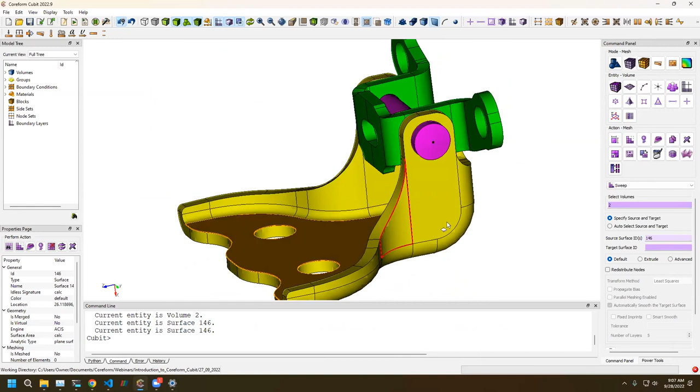Cubit only supports 1-to-1 or many surfaces to one surface sweeps. And so this would not be a sweepable topology. But with compositing, what we can do is we can take all of these surfaces and essentially make them one macro surface and do the same with the other surfaces, so that we would then have a 1-to-1 sweep. So I'll show that here, building that.

So if we just draw this volume by itself, I'm going to color my curves black here so we can see as this happens. Now we're going to access this through the command panel. I'm using the classic navigation for the command panel, which can be set in the tools options under the command panel's classic. You may not have the classic mode. I just grew up with the classic mode, so that's what I'm familiar with. So your ordering might be a little bit different.

But where you're going to find it is under Surfaces, Modify, and then Composite. And we call it virtual geometry, which is kind of our synonym for virtual topology. They mean the same thing. Some of our operations in Cubit are virtual, and you'll see that in a little box here that'll identify that as such. So I'm going to select my surfaces.

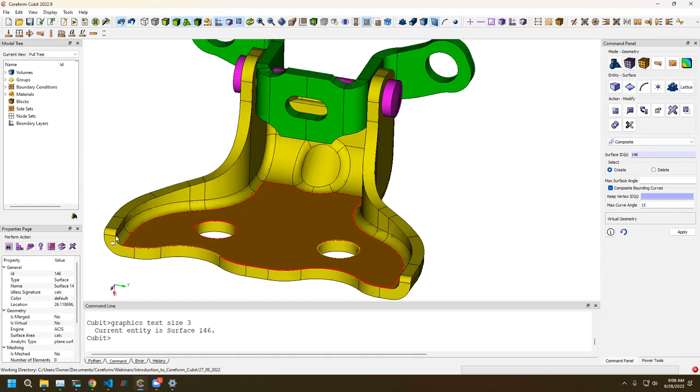Now I could try to manually go through and select multiple surfaces, but that might be a lot of clicking. So one of the things that's really cool in Cubit is if we select a surface and then right click, we have options for selecting multiple surfaces at once. This is like a cavity, so we could select the entire cavity, and that selects multiple surfaces. But these surfaces are also all tangent and continuous with each other, so we could also have selected continuous here.

So I'm going to select those. It automatically populates the pick widget here for how many surfaces I'm selecting. I'm going to go ahead and apply. And what you'll see is that once I've hit apply, what had been solid black curves are now these dashed lines. Those dashed lines essentially mean that the meshing tool is going to ignore those boundaries.

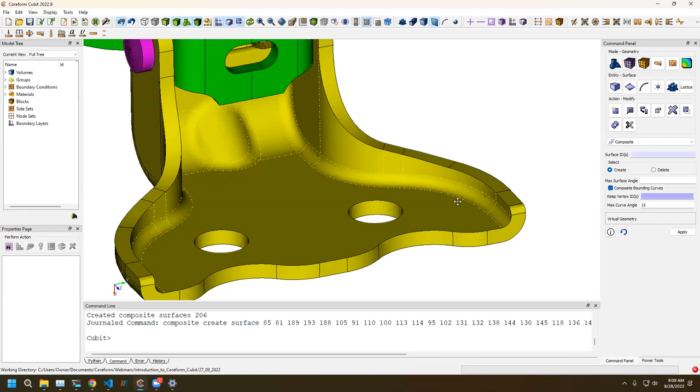So just to show that real quick, if I build a quick mesh on this, you'll notice how these elements, if I flip back and forth, still are matching to the geometry, but they're no longer restricted to the topology of these surfaces. And if I were to refine the mesh more, we would get closer and closer geometric approximation.

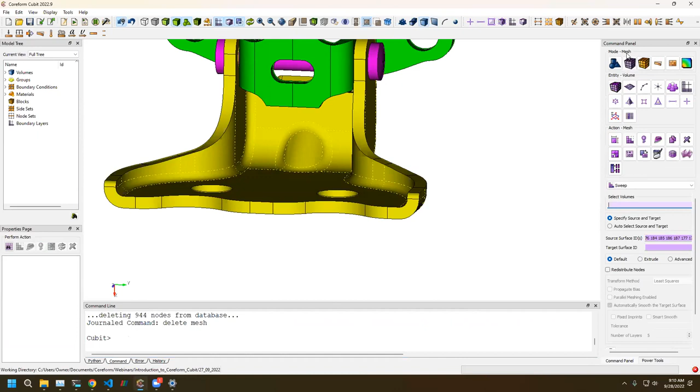But now I'm going to go ahead and select the other surfaces on this other side. I'm going to composite those as well. I'm going to delete my mesh real quick. And so I can now mesh this volume. So if I go into my mesh mode, volume, sweep, I can then pick my source surface. Notice it's a single ID now, and then a target surface to a single ID, and that builds the mesh on that part.

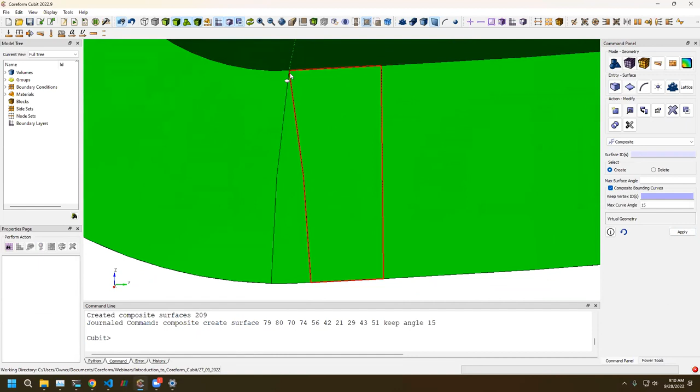Similarly, I can do that with this other part. I can take that same approach of doing composite surfaces. The one challenge here is it's not actually sweepable because I've got some linking curves that essentially take a finite distance to a zero length. So I can't sweep along that. But I can again use compositing to say, well, I can kind of see what's going on here. I just need to have linking curves that go from one surface to the other without kind of disappearing.

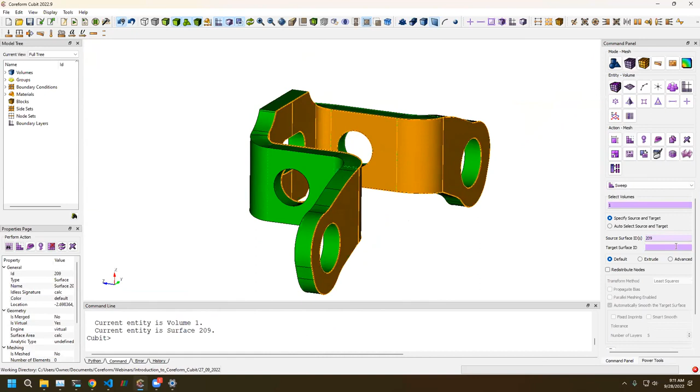So I'm just going to select these surfaces and composite them together into a single macro surface. And so now we can see that that topology is going to be ignored by the mesher. And I've got a similar case over here. And so now with that done, I can select my volume, select my source surface and my target surface, and build my mesh.

Now I could even have gone a little bit more heavy on my compositing. We see here that there's maybe a small surface here as well. I could have composited that in too. So anyways, Cubit's thinking here real hard. I've got a development build here, so it's got maybe some stability issues. So we'll wait on that, but that'll finish meshing at some point.

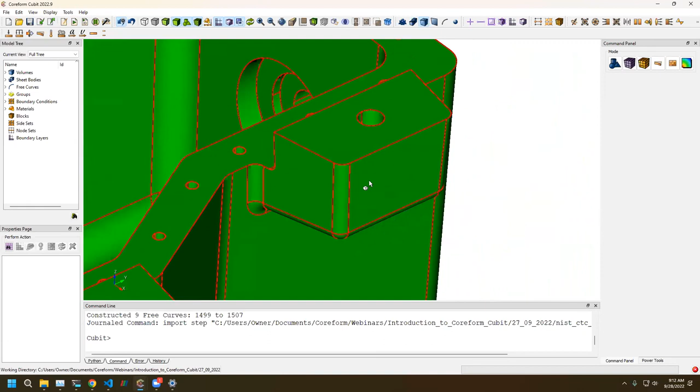I'm also going to show another model that's maybe a little bit more challenging. So let's say that we've got this gearbox housing and we want to run an analysis on this, but let's say for sake of argument that we noticed we'd had some failure occurring in this standoff here. And so we want to have a detailed mesh of the fillets on this subregion, but we don't really care about the fillets everywhere else.

As you can also see, there's some orphan curves and maybe some embossed features that we wouldn't want. So I'm going to show some cleanup of this model first before we go with meshing. And there's a free surface here too. So one of the things I like to do is clean up all of these free curves, either by selecting them in our model tree and deleting them.

We could also run a command, say delete curve all, in our command line, and that would delete them all. Or through the GUI, through the curve tool delete, and we just say all. This will only delete orphan or free curves, so it won't delete curves that are already part of a volume. So you can see I deleted that and some of these curves have gone away. I still got this surface here. I can delete that as well by just deleting all. So it's just deleting those unowned surfaces.

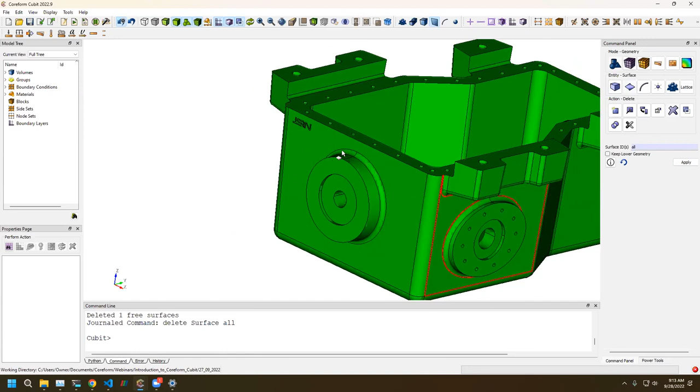Now, compositing is a virtual operation with surfaces, but we also have real operations. So if we were still under the geometry mode, surface, modify, if instead of compositing we chose remove, we'll see we don't have that virtual geometry box here. So this is going to be a real geometry operation.

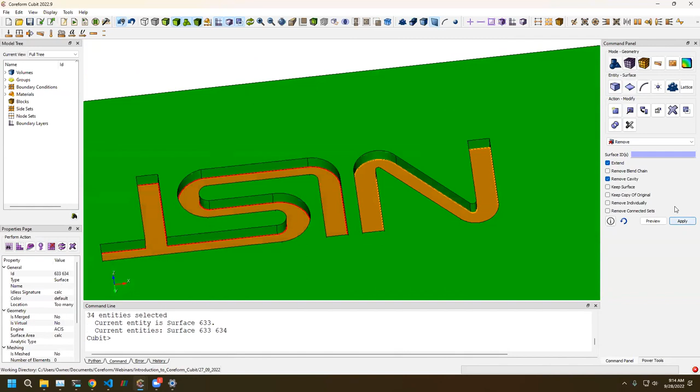And what I can do is just select a single surface inside of these subregions. And notice if I have remove cavity on, that will then remove all of these surfaces, which would almost have been the same as if I'd right-clicked and said select cavity. So you can see what's going to happen if I had that remove cavity on. I could only select a single surface and remove them from the model. So just some really quick tools to do some of that.

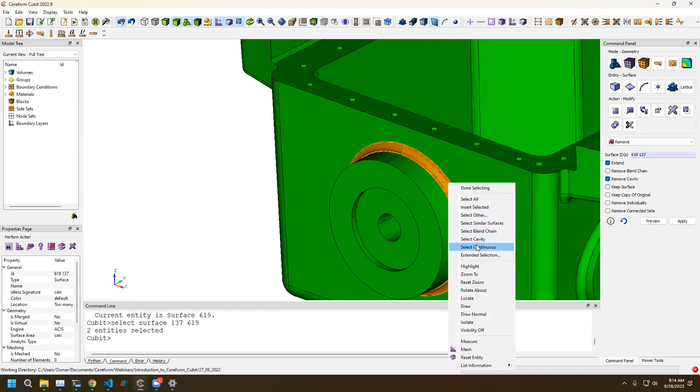Additionally, we mentioned previously that maybe we don't want to have to worry about a lot of these fillets. So we can select surfaces quickly. We can select similar surfaces. So I've selected these two fillets here. When I right-clicked and said select similar, it selected the surfaces over here as well. And I can remove those just through an extend. And so I can select an entire blend chain and remove them.

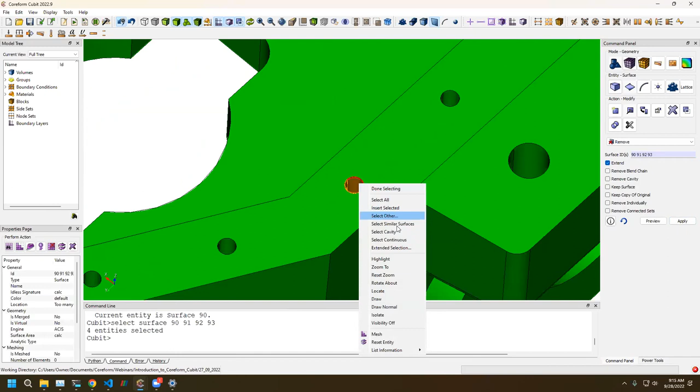And so it's a really quick way to remove a lot of fillets from your model, as well as if you select a blend chain and you want to select any other blend chains that are equivalent to that. That's going to select the opposite side as well and remove them. Say that we want to remove these little holes that we don't really care about. We can select the cavity, select similar. It'll select all of these little holes and we can remove them.

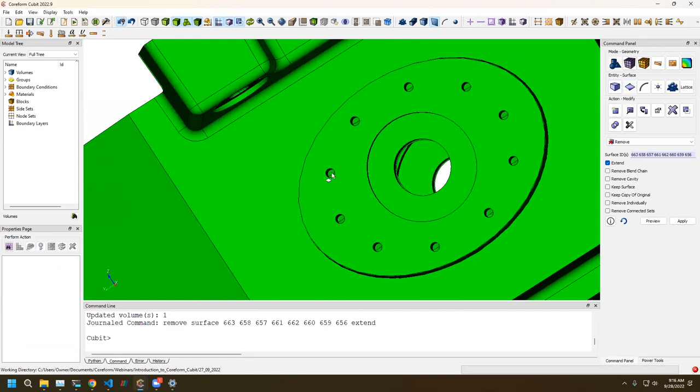If you select a surface with your mouse and maybe you just missed by a little bit, if you hit the tab button, it'll cycle through selections. So by selecting a single surface, I can then find that internal surface. So I'm going to select this hole, select similar. It's going to select the other hole over there. Insert those into my pick widget, remove them. And similar story with these holes. So again, through the right-click context menu.

So now, as I was saying, let's imagine that the challenge I've got is I'm trying to mesh this little standoff here. So one of the things I might want to do is extract out that single volume. So I'm going to webcut my geometry until I've got that volume isolated. So I'm going to sweep a surface here, and sweep this surface perpendicular.

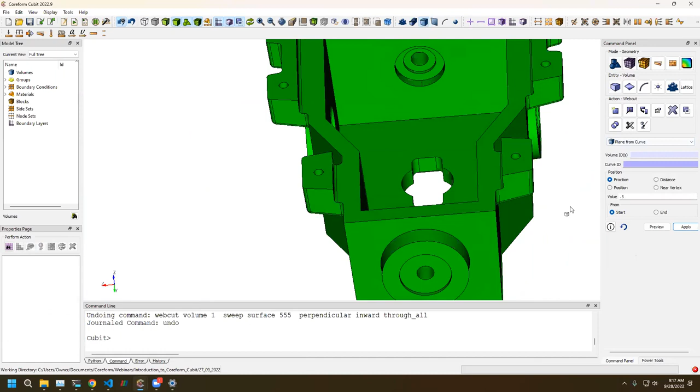Oops, that's not what I meant to do. I meant to chop plane from curve. So I'm going to cut this volume. I oftentimes like to do this preview to see what my cuts are going to be doing. We're going to draw this volume by itself, and then I should be able to sweep curves. So I'm going to cut this volume with these curves swept in the -1, 0 direction.

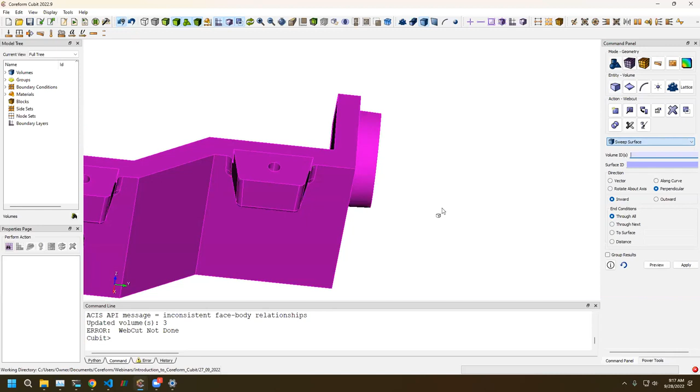All right, so we just need to do a couple more cuts here. So let's sweep surface, perpendicular first. This may actually do what we wanted. Good. So one of the things I wanted to do here is this fillet.

If we had chopped this fillet instead by a plane surface, so if we had used this plane, do you see how that would have led to kind of a tangency on my cut? That would essentially be really difficult to hex mesh. If you were to refine your hex mesh, you get closer and closer to a tangency, which would result in worse and worse hex element qualities.

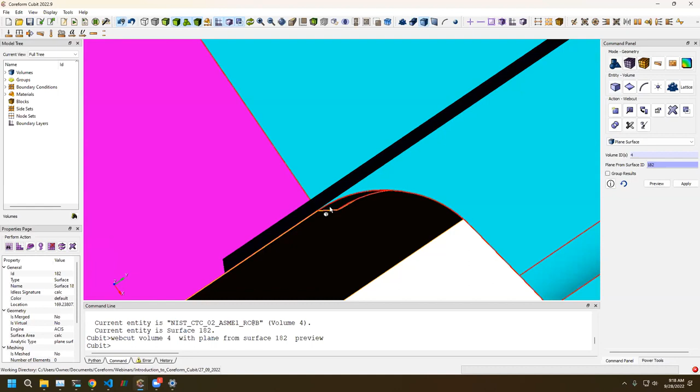That's why when I saw that fillet, I chose to do a web cut that would instead result in me getting kind of this perpendicularity at that. So I went from a tangency to something that's perpendicular. And that's really crucial if you want to try to keep those kinds of features in your model.

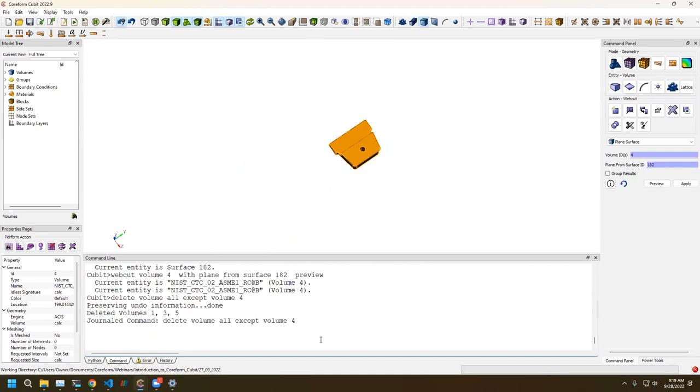Now, for simplicity here, I'm going to remove all of the other volumes. So I'm going to delete all volumes except for volume 4. I'm just going to type it in my command line here, delete volume all except volume 4. And that's using the extended Boolean functionality of the command line. And then I'm going to compress. I've just done that so that we can show how we're going to mesh this one volume and use compositing to help us out here.

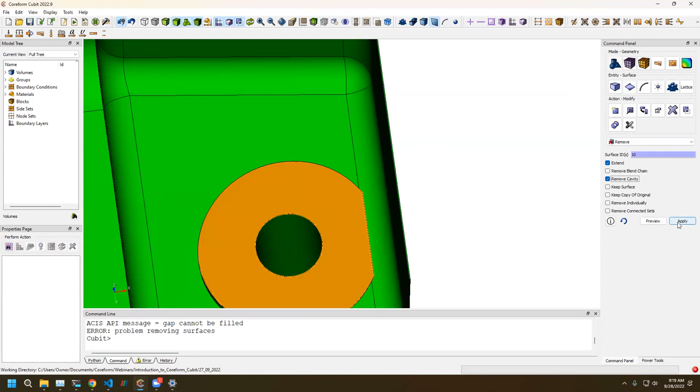So if we just explore this volume a little bit, some of the things we'll notice are I've got these shoulder fillets, and these curves, if I look at them, they don't quite lie in a plane. Some of these are like a straight line, but this is like an arc curve that kind of comes out of the plane. And this curve takes another angle. So you can kind of see, I can't really do a cut. Oh, and one more surface I meant to remove here real quick is this little surface. There we go. So I can't just chop it off. It's maybe a little bit confusing how we would do that.

So what I'm going to do is, I've kind of mentally already segmented this volume into different regions. I can see how, again, I can get myself perpendicularities by, say, chopping this volume with this curve, taking the normal at this vertex, which is going to just, oops. But yeah, that's right. So even if we were to do that, you can see that I don't even have planarities here. And so oftentimes a similar functionality to the plane from curve is to actually do this sweep surface.

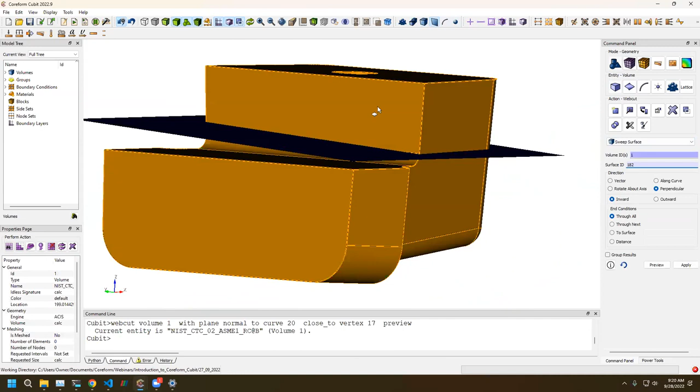So I'm going to take this volume, I'm going to sweep this surface perpendicular to itself. And then that's going to get me that nice little cut across that surface here. So that's the cut I'm going to do. Hopefully that's kind of clear why I've done that. But that separates this volume from everything else. Similarly, I can see that I can get a perpendicular cut if I chop this volume here.

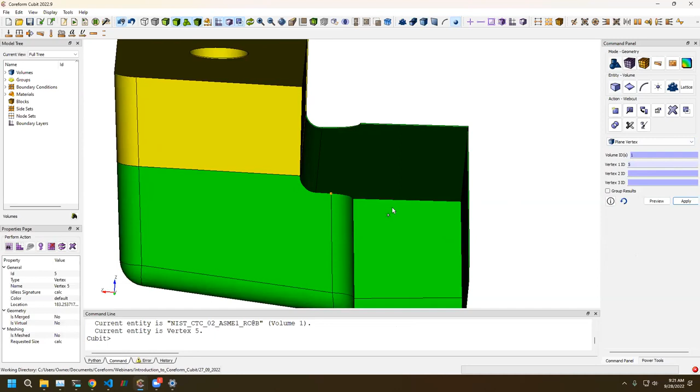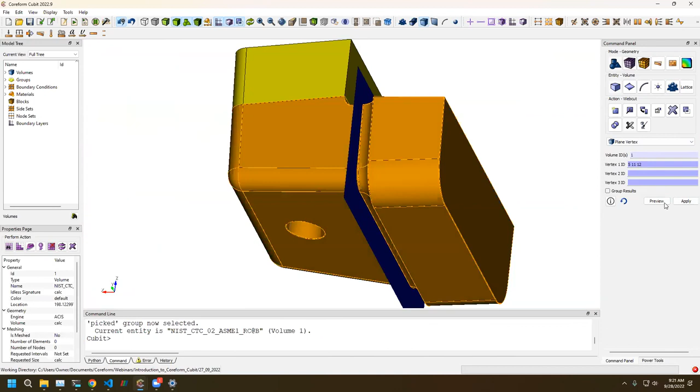So what I'm going to do is choose a plane vertex. I'm going to cut this volume. The 3 vertices I'm going to use are going to be these 3. Now, what you'll notice is if we look at what this cut is going to do, I'm going to get some thin slivery surfaces that would traditionally be really difficult to mesh. But we're going to utilize compositing to remove those.

So if we just draw this volume, again, we see that there are those slivers. What I can do is come in and composite these together into a single surface again, which will get rid of them. So we know that we can do that. We're going to hold off on that for now because we're going to do some more cutting of this volume. But that's going to be our strategy. We know we can come back through and composite.

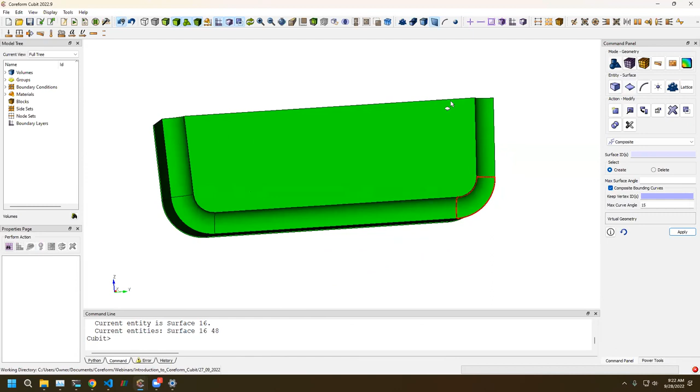What I'm going to do is try to cut in like an H here to chop off these shoulder fillet regions. And then I'm going to be left with a square in the middle. So again, I'm going to use chopping by plane vertex. So I'm going to choose these vertices to make this cut.

And then I'm going to use these vertices to make that cut as well, and I'm going to cut all of them with vertices that come from these volumes to make this cut.

So again, we haven't really bothered with worrying about this topology that we've created.

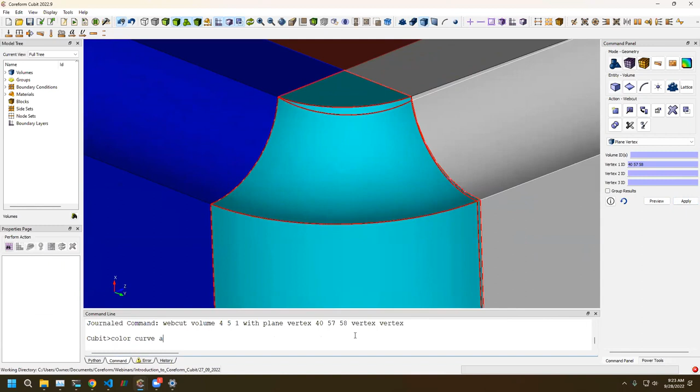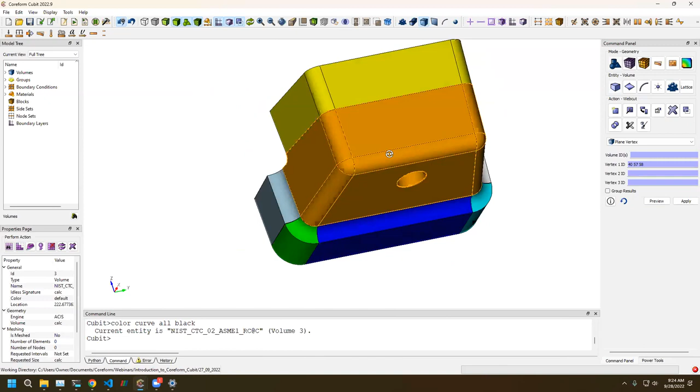So Greg, why at this point are you making all these cuts? Because you could strictly just sweep from one to the other now. I could. There are some abilities to do that, but the problem is going to be that when I reach the other side of this volume and hit these shoulder fillets, that's going to end up being a tough topology for Cubit to mesh. So I'm kind of planning ahead, trying to build each individual volume with merged surfaces. We're going to cut this down to its maximum cutting, partially so I can show the compositing work. But really this volume is the challenge. These shoulder fillets are the challenge of this model, where traditionally I might just remove the surfaces and make them sharp corners to get rid of that issue, because they're so challenging.

That's a good question. But I typically find that when I have problems like this, it works really well if I just chop them up as much as I can. So I'm going to draw vol all except vol 2 and 3. But thanks for the question, that's really good and insightful.

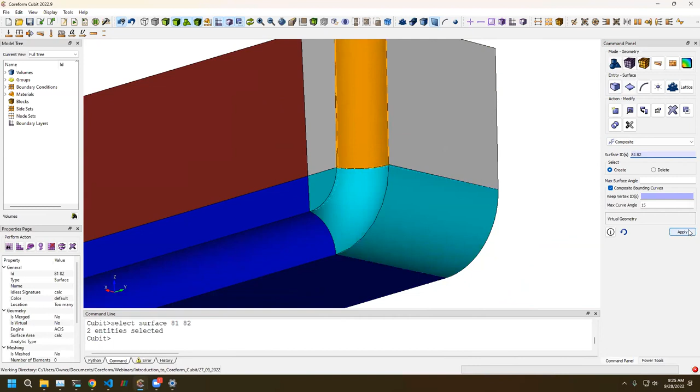So now what I'm going to do is use that same select cavity, or select continuous, to select all of those little sliver surfaces in this feature and composite them together. And because these are separate volumes, they're not stretching over to the neighbors. So I'm just going to select all of these here, and here, and here. I think I've got them all. One way to check is that as you go across, especially with just those slivers, they'll show up as a select continuous. So if you can't select continuous, or if you only get one surface, then you're pretty confident you've only got one.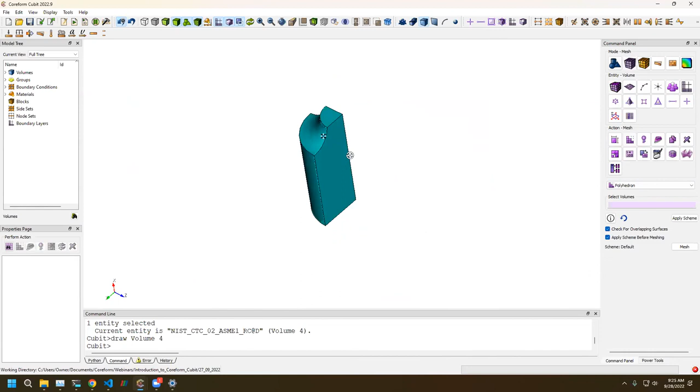So then one of the things that's kind of nice is this kind of geometry we just drew. This is tailor-made for this polyhedron scheme, which will put a pretty good quality layout of hexes on that volume. So by doing that decomposition, I've left myself with some volumes that I know I can mesh with polyhedron. And then I've got some other surfaces that maybe are going to be nice structured. So I've kind of built up what that sweep could have looked like, but I really do like to cut them up like this.

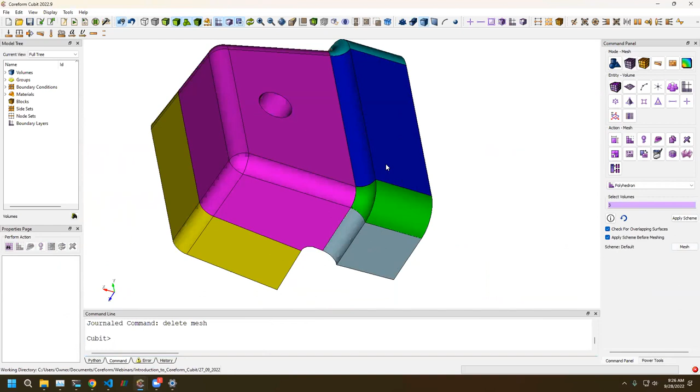If we delete the mesh, we can kind of look at the neighbors. If we were to do a quick imprint all here, we'll notice that this neighboring volume is going to have that topology coming from its neighbors, which again needs to be able to sweep through.

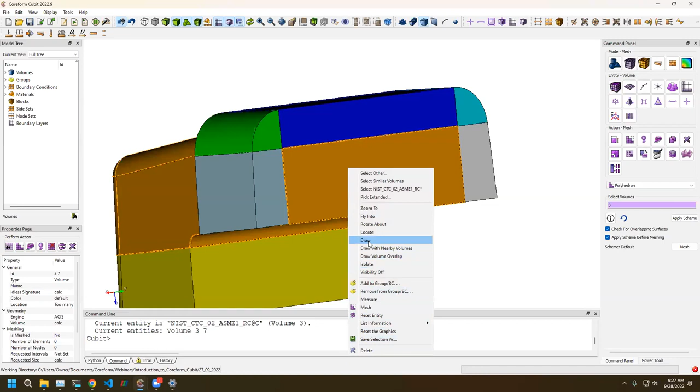So I'm going to even have these cuts go through this volume. I could have done cutting all the volumes at the exact same time, but I wanted to show why we might have done that. Again, when we want these conforming meshes, we're going to have topology shared across these boundaries, and it's this topology that then has to work its way over to the shoulder fillet. So let me quick here, I'm going to draw this volume and then this volume so I can quickly get what those cuts are.

I can cut my volume from plane surfaces. In fact, I'm now going to do all. So I'm going to cut with this plane. Oh, actually, no, I don't want to do that because that's right.

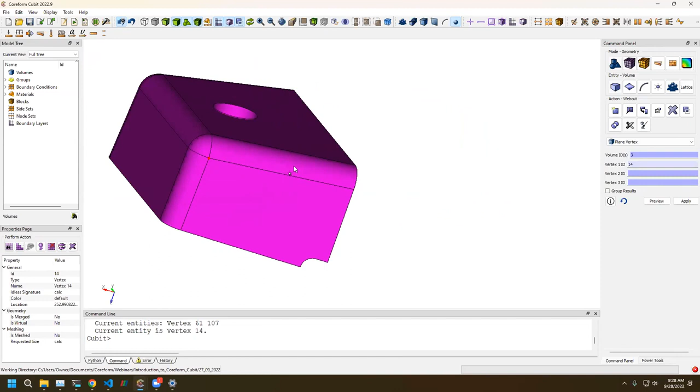All I really need to make sure is that I'm going to capture this topology in here. So I actually just want to do plane vertices still, cut this volume. I'm going to grab some of those vertices that were coming through from that previous layer, and then map it onto this surface at the top here. And so you can see again, I'm going to kind of be compositing that shoulder fillet away as well with that same kind of technique.

And then select these volumes, cut with the vertex. Actually, let's see, I don't think I want to actually do that, say, these three vertices.

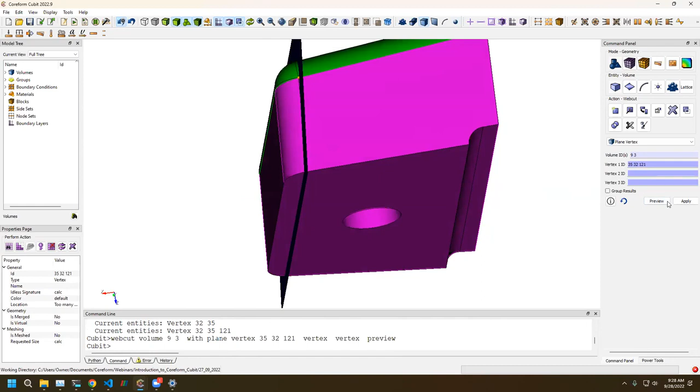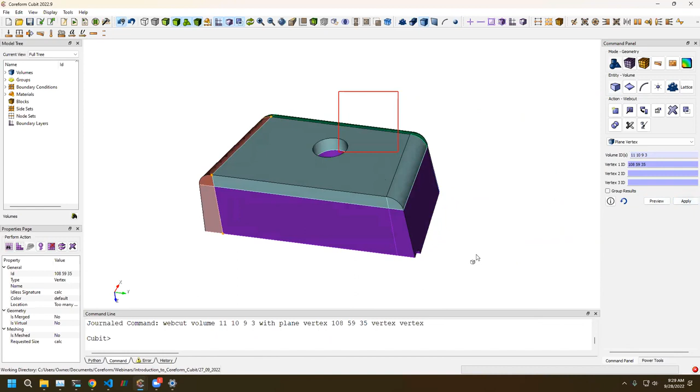And then we're going to want to cut on these vertices. Again, I'm trying to keep that topology from the neighboring section so that I won't have to go back and recut my previous volume.

So what I'm gonna have to do now is rely on compositing to mesh these individual sections. A couple other things I'm gonna do. I'm running short on time, so I may just give an idea for what I'm gonna do next here.

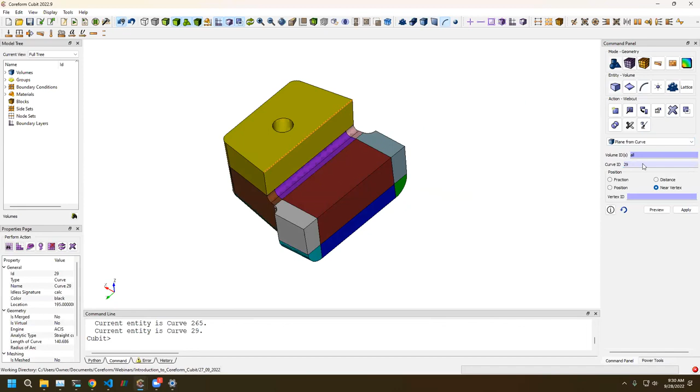I'm gonna cut my volume in half so that I don't have this large volume around this circle. So I'm gonna do a plane from a curve. I'm gonna select all of these volumes, and then select this curve at its midpoint.

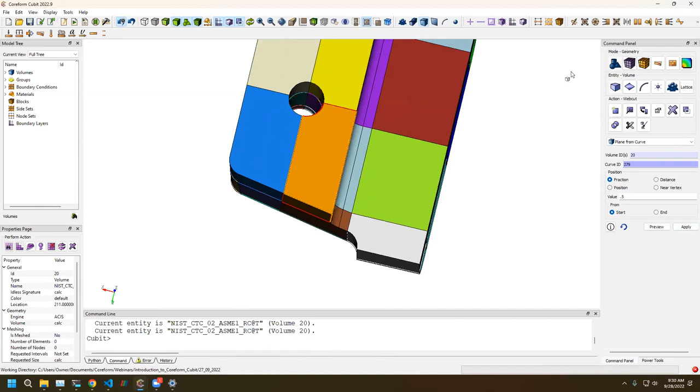And then I'm going to cut these volumes again along these curve midpoints. So what I've done is I've now got some blocky sections that I can see how I can build, or how Cubit's going to be able to build this. I can even do a polyhedron mesh on these volumes, so I've broken it down into these elementary volumes that I'm going to be able to mesh.

But just to show more of this compositing in play here, if I'm just going to composite surfaces, I'm going to select continuous surfaces. I can probably select similar - there's probably duplicates on the other side.

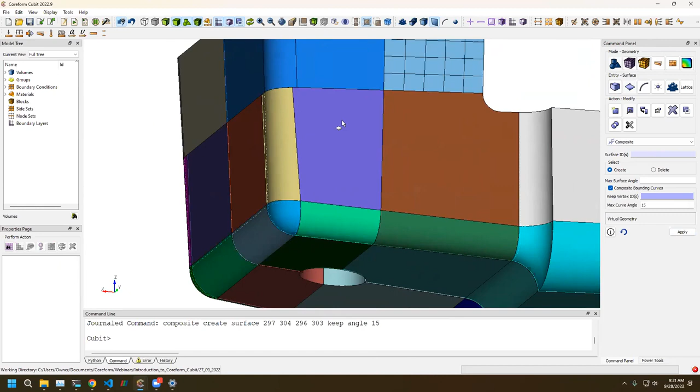And just come through and composite these all away. So that's the strategy that I've done here. I think we're just about out of time, Matt, so I may leave it here, but this is the strategy of compositing away so they don't have to worry about trying to mesh this complex topology in my resulting mesh.

So what I'm left with is I'm going to be left with volumes - oops, that's a surface - I'm going to be left with volumes that are then meshable with one of these elementary schemes like polyhedron. And so that's how this shoulder fillet is going to be able to be meshed and still conform with its neighbors.

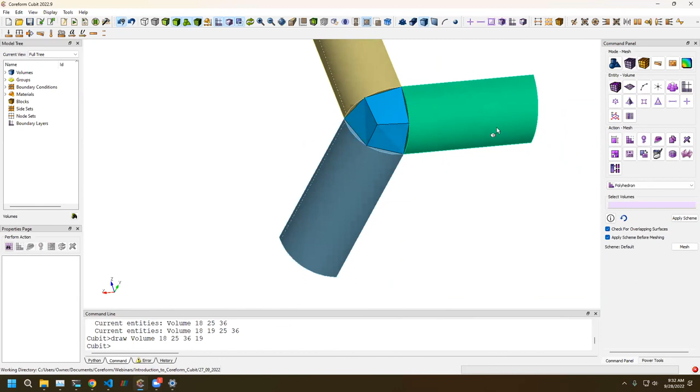So if I draw it, say with these neighboring volumes here, just to show that. Because I don't have to worry about this extra topology, if I do this imprint and merge to be able to get my conforming meshes, we typically start with, let's mesh the polyhedron volume first, and then mesh the neighbors. So that's how we're going to end up building this model, through that decomposition and compositing of surfaces.

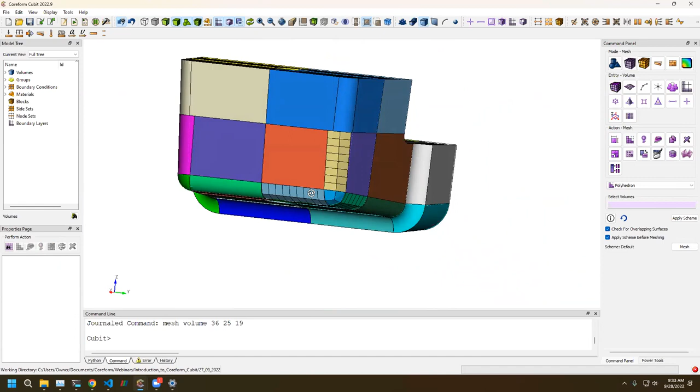And so you can see there's a lot of surfaces here that we're going to go ahead and composite away. And that's typically my strategy for meshing these kinds of volumes, where I really care about getting highly accurate results for plasticity and stresses in a high quality analysis. I like to build these meshes from the ground up like that.

So Matt, if there are questions, we can go ahead and field them now. I'm happy to continue finishing this if we still have time. I mean, I think we're all enamored and want to just see the mesh.

All right, maybe you could continue meshing, and there are some questions coming in. Great, so the extent that you can talk and mesh at the same time, this will be your test.

Perfect. So one question is, as you were determining what scheme to add to these, there's an automatically detect function for the meshing schemes. Would that detect polyhedron? Is that reliably going to predict the right one? So I have found that the automatically calculate almost never predicts polyhedron scheme.

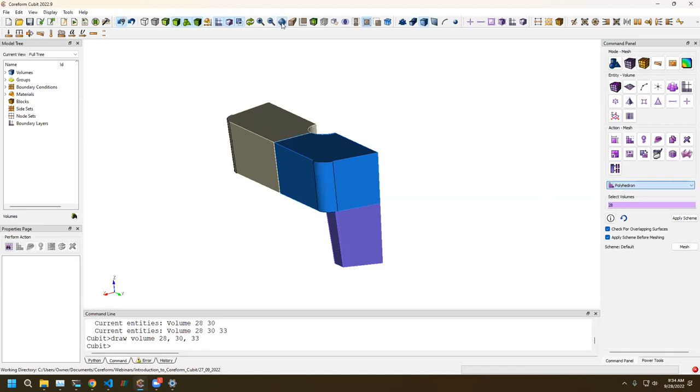So typically what I'll do, my strategy is, before I ever do the imprint, merge and mesh, I will unmerge first, then try to select all and mesh all the volumes separately and see what volumes don't mesh. And if there are volumes that don't mesh, that could either be that they have challenging topology, like I haven't composited these surfaces yet, or that they are a polyhedron scheme.

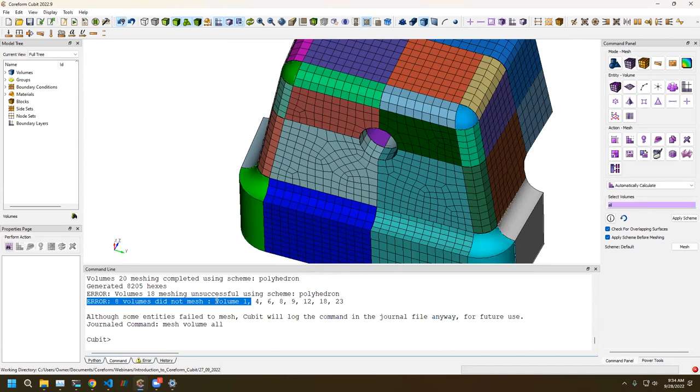One of the things I like to do is, it'll give you an error for what volumes didn't mesh. And so you can copy this and say, draw a volume, and it'll draw you those volumes. And you can then quickly see - oh, that's a polyhedron scheme, these I need to composite, but then they're going to be a polyhedron. These guys are polyhedron. That's my approach.

So if I had done this, I'd say, okay, I know that I want to composite these surfaces, and then I want to apply a polyhedron scheme to these volumes. Again, I'm getting that warning because I haven't yet done my imprint and merge.

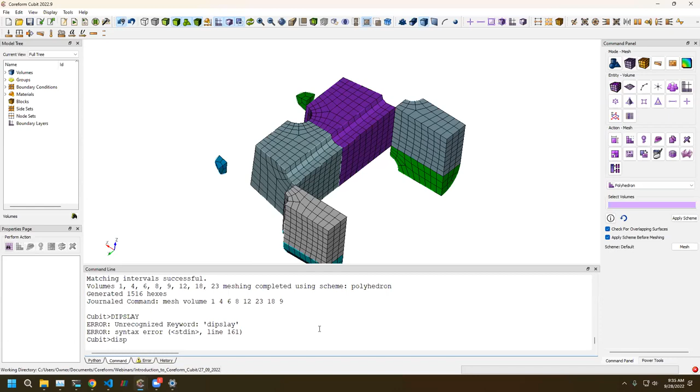Essentially, if you can't build a mesh before everything's imprinted and merged, you won't be able to mesh it once they're imprinted and merged. Imprinting and merging makes the problem more challenging. So I always like to try to mesh prior to imprinting and merging, see what kinds of volumes might have to have a polyhedron scheme, and then I move forward. And then I'll imprint and merge and see how things update.

Yeah, that's a good question. Good, that's really helpful just to see how you approach this. Those bag of tricks are really valuable.

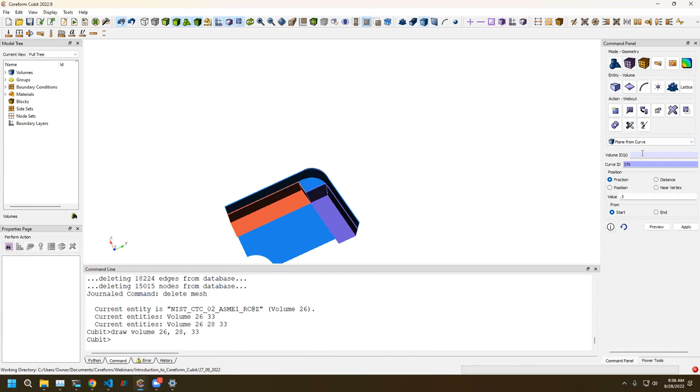Maybe we'll let you finish this up. Here's another question that came in, you can choose to answer it now or after you're done: how do you mesh volumes that have very sharp angles and are cylindrical at the same time?

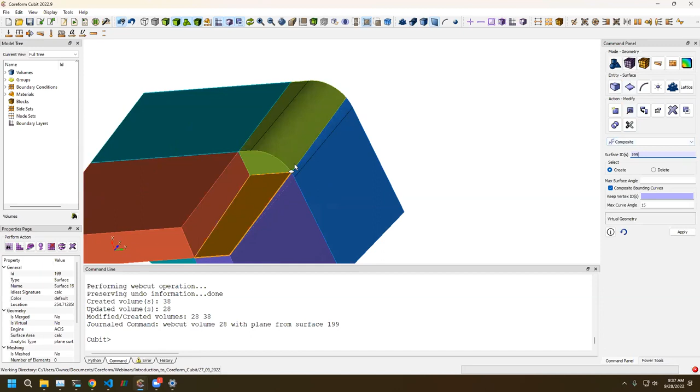I'm not sure if I understand what the geometry for that looks like. Maybe I could finish this up, and then Ibrahim, if you can clarify it, you can take a stab at that. Maybe if you can find a picture on Google Images of something similar, and drop a link in the chat, or share a screen with an example, we could talk about it. But without seeing it, I'm not sure I quite understand what it is, unfortunately.

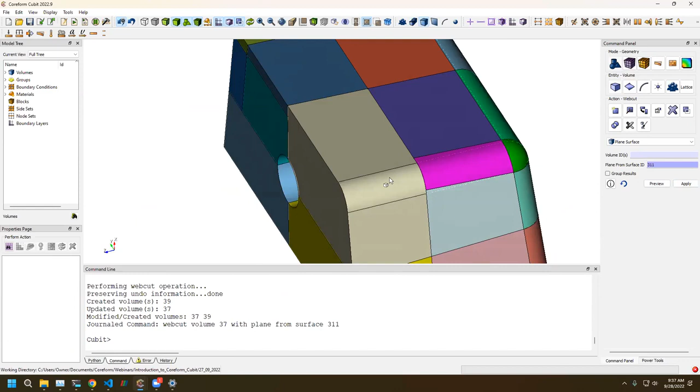So where are you at right now when you're troubleshooting this, Greg? Right now what I'm doing is I'm propagating my cuts through my volume, just propagating them up. These aren't strictly needed, but since I've already kind of decided that this is the one volume, or one region, I care about, I'm okay spending time doing extensive web cutting on this singular area. I want to make sure it's robust, so I'm just coming through and propagating my cuts through my model.

Yeah, because it looked like you already meshed this successfully, right? I meshed it without having it imprinted and merged, and so that would be a non-conforming hex mesh. The regions weren't connected yet.

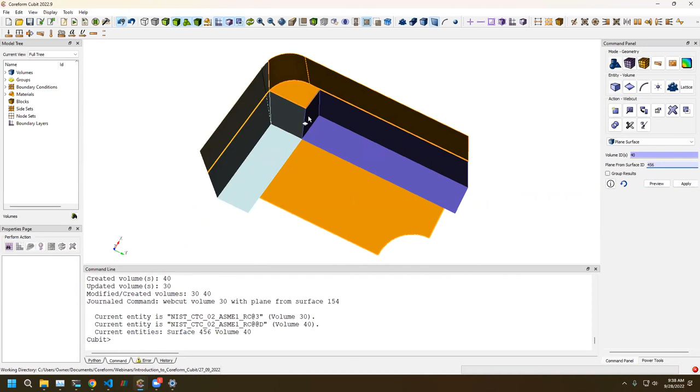But you could have just imprinted and merged directly. I could have, but that may have resulted in some challenging topology I'd need to come through and handle. So instead of relying on the imprint and resulting in a challenging interval-solving problem, I'm going to propagate my web cuts through. If it's crystal clear to me how the volume gets meshed, it'll be crystal clear to Cubit how it's supposed to be meshed, is what I'm banking on here.

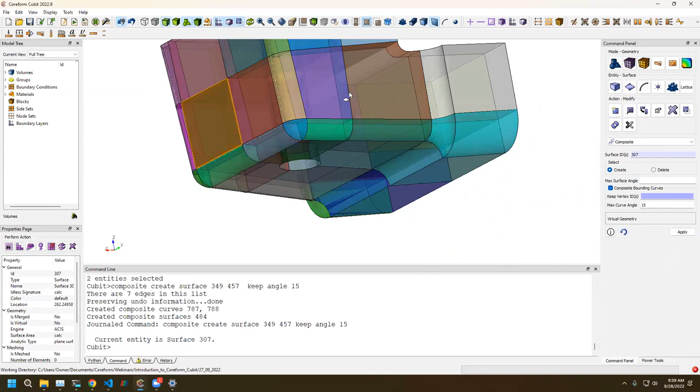So I think that should be about it. One of the things I like to do is, if I've done all this extensive web cutting, I should probably just double check that I don't have any other slivers. I should be able to now just do a merge all. I can draw a surface all with is merged, so I can see if there's... let's see, where was that?

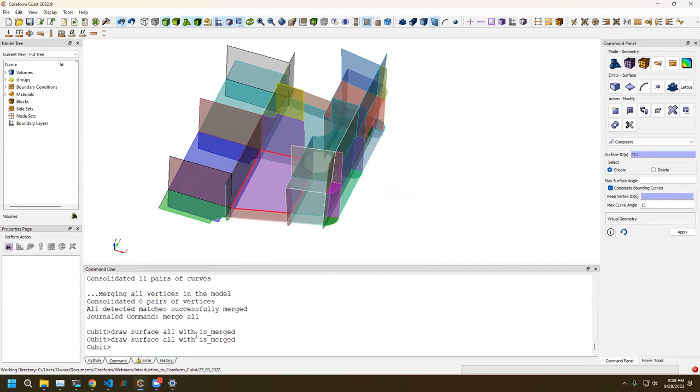Yeah, so I've got some surfaces that didn't get merged in between. That might be where I would go ahead and now just do well... I guess I want to composite this surface, don't I? So let's composite and similar, composite those away.

With is merged, it looks like I've got every surface. We're just about missing a couple. So I may do at this point my imprints because I'm pretty far along. So imprint all, and let's try our merge all.

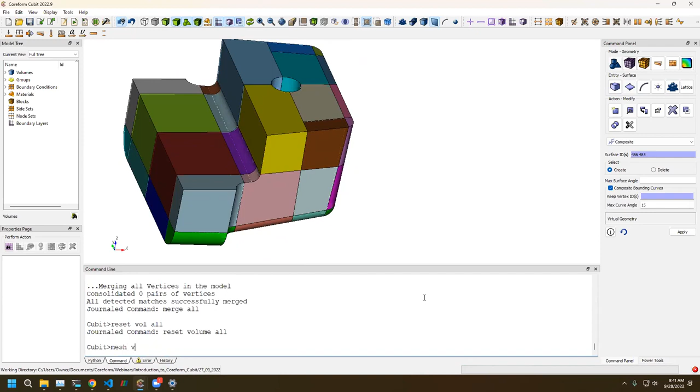And what I probably need to do is reset vol all, and mesh vol all to see what the default schemes get assigned and what ones struggle. So again, I've got these six volumes that didn't mesh. I'm going to set them to polyhedron.

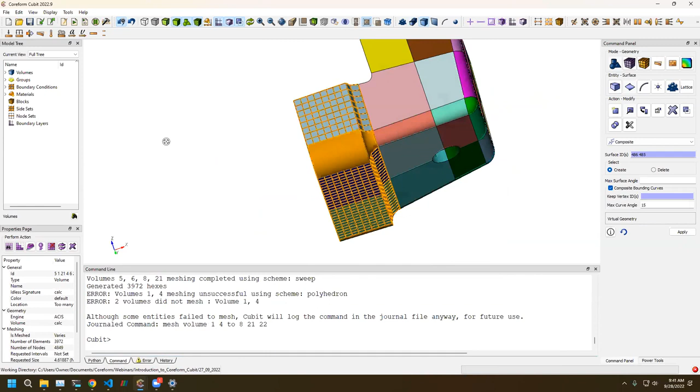And then I typically like to mesh those volumes first. But actually what I'm going to do is start by meshing from one side and then through and up, so I should be able to mesh these volumes all in one go. If they can't, I'll probably need to set this to a polyhedron scheme - I think it's probably a sweep. So let's set our polyhedron scheme. Yep, they were sweeps, so we'll mesh those.

And then these are just maps, so we should be able to mesh those volumes. So those guys are done, out of the way. And then we can see about trying to mesh these middle volumes. I'm going to draw these by themselves.

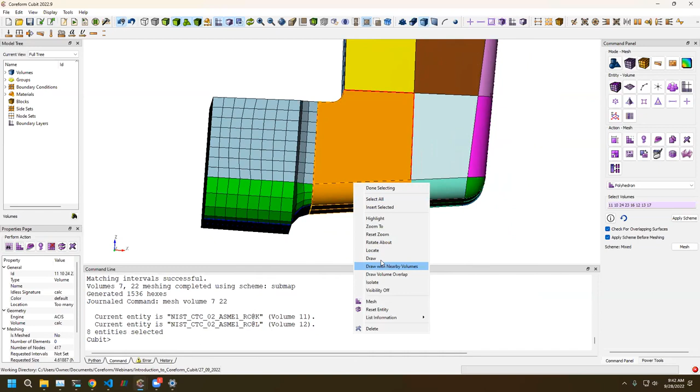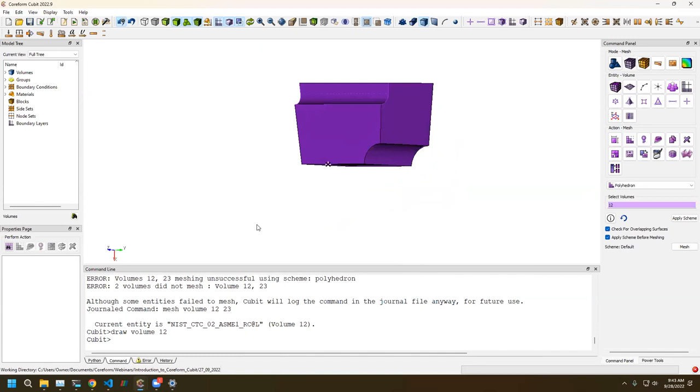Looks like it's going to all mesh. These guys probably need to be meshed first. So let's go back to our, we'll mesh these volumes. Mesh these middle volumes. Okay, so this is where we've got, let's take a look at their topology here. It's really interesting how the order matters here, isn't it? It is, yep.

Typically, I like to go from most constrained volumes to least constrained. So these are clearly a constrained volume. Let's take a look at these two together.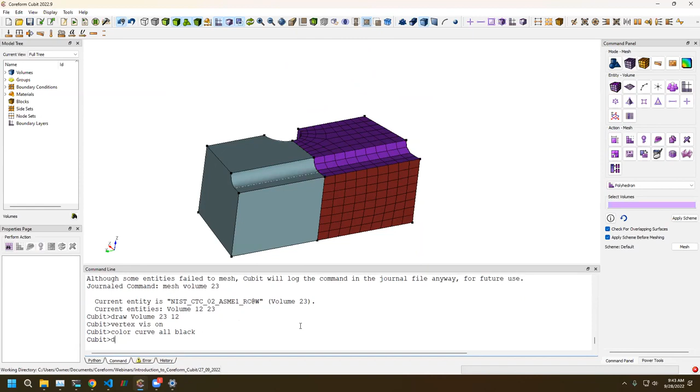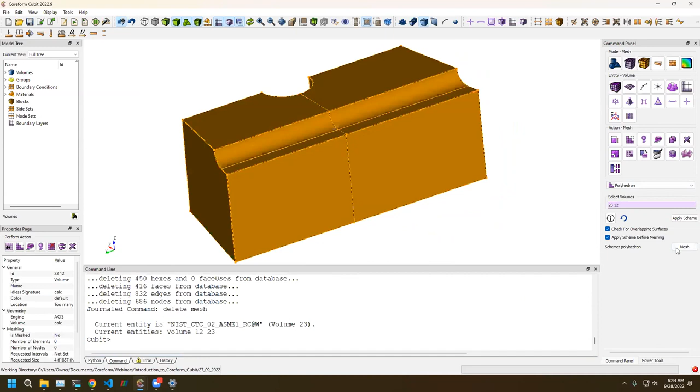So why are you turning on the vertices here? I like to see vertices. It helps me find if there's maybe a small sliver curve somewhere, or like a vertex that I hadn't expected. So if this curve down here might have been, say, 2 curves, then I would see a black dot here, and that might be helpful for me to understand what's going on. Okay, so we mesh those together at the same time.

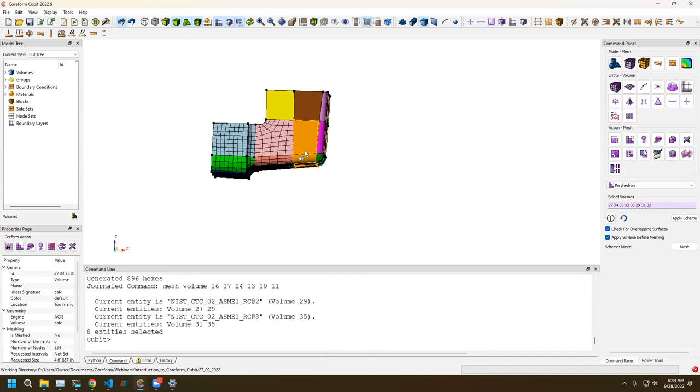Let's see if we can now mesh these volumes. Volumes around. Let's draw these volumes here. See if we can get them all in one go. We did. Should be able to now mesh these volumes on the very edge.

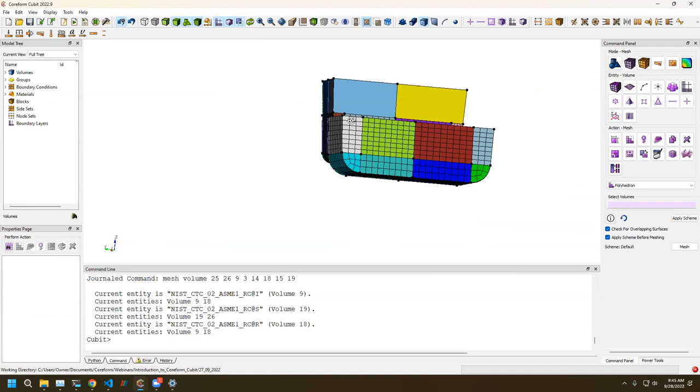Okay, so we just missed on these little shoulder fillets. So we are making mental notes here that I've got to be able to mesh these guys probably first, along with those other polyhedrons. So we're going to extract out what seem to be the challenge volumes. Mesh these, mesh the shoulders. All right.

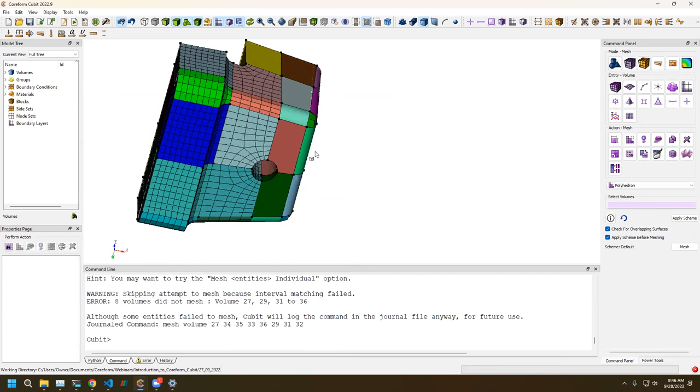Yeah, so we've got interval matching failing here. That's what we're dealing with. And that's again, just like from composite or from imprinting and merging, becomes a challenge here. So let's try. Meshing out. See if we can mesh. Okay, so let's try from here now.

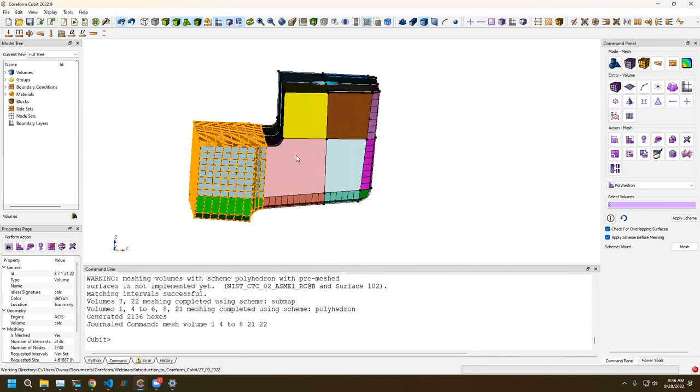Yeah, so we're running into, let's see. I had this working earlier today, so I'll have to figure out what's going on here. Looks like I should be able to sweep this volume. So maybe it's just my sweep directions need to be modified. You know, thanks for wrestling this, Greg. This is where most of the time goes with hex meshing, so it's really helpful to see you use different approaches.

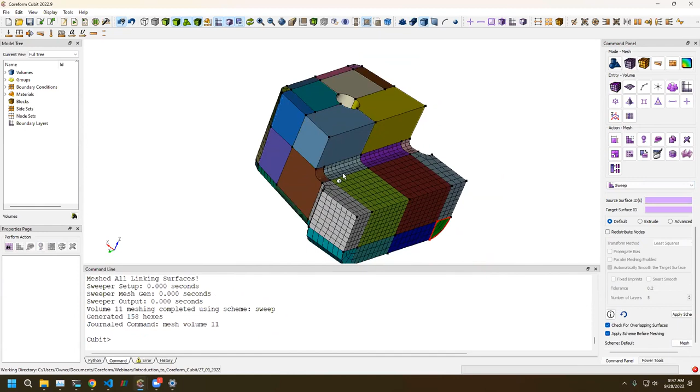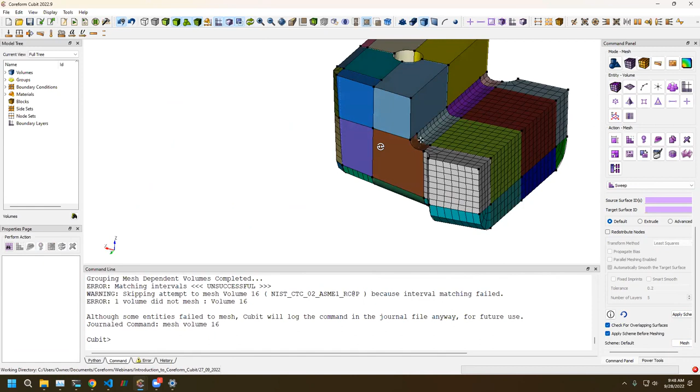Yeah. And again, my typical approach is that you have to play around with some of the meshing to get a feel for what the most constrained regions or volumes are. Like the polyhedron scheme has some requirements on it as far as what the surface schemes end up needing to be. And so those end up oftentimes being the restricting. So it's a game of trying to figure out how to build that mesh in that manner.

So let's try something else here. Let's try meshing, set my sweep schemes here. Might have accidentally changed those away from polyhedron.

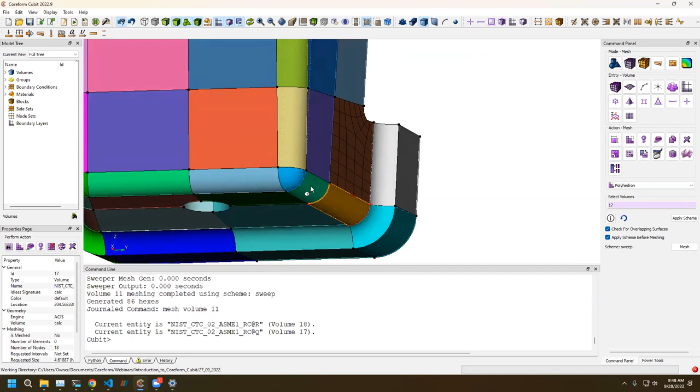Whoop. Well, I managed to crash Cubit, unfortunately. So sorry about that. That little demo didn't quite work, but if I work that problem a little bit more, that problem becomes meshable through compositing. I'm sorry, I'm using one of our development builds of Cubit, so I've got a couple instabilities.

Because this volume looks like it failed to mesh, it's probably just I need to switch my source and target surfaces to the other direction, if I had to guess. And I'm going to go ahead and even do that compositing that we talked about.

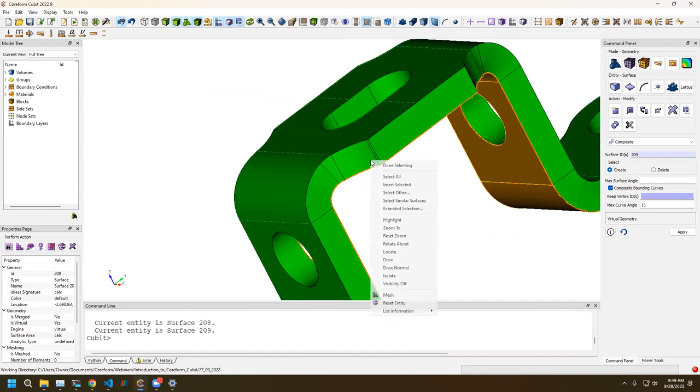Anyways, I hope that this shows compositing and how it can be used on some of these challenging sorts of models as a tool to redefine the topology that's going to be tracked by your mesher. So I guess, are there any other questions, Matt?

No, that's super helpful, Greg. There's a couple of questions that have come in, but I've asked them to redirect to the forum because they're about slightly different topics, and it's been really useful what you've showed so far. Okay. Cool.

Great. So in conclusion, thanks for spending some time with us today. Hopefully that's helpful for you to see different techniques to approach composite meshing in Cubit.